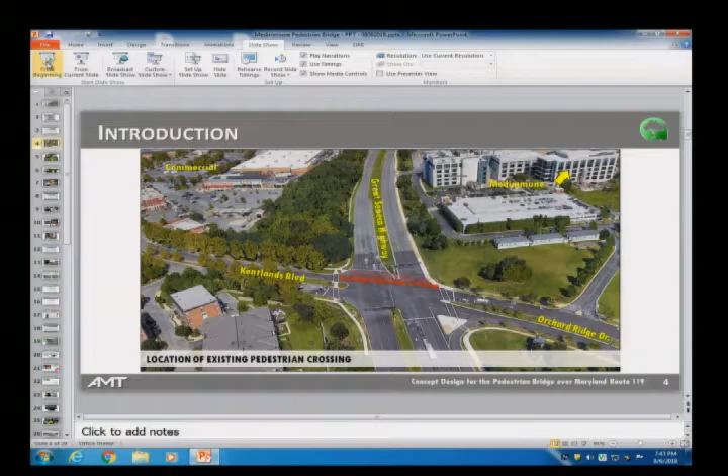What you see here is an aerial view of the project site. Let me make it full screen—sorry about that. You can see the Great Seneca Highway, and on the right side the MedImmune complex. On the left is the Kentlands Town Center commercial development, and we've labeled in red the existing at-grade pedestrian crossing.

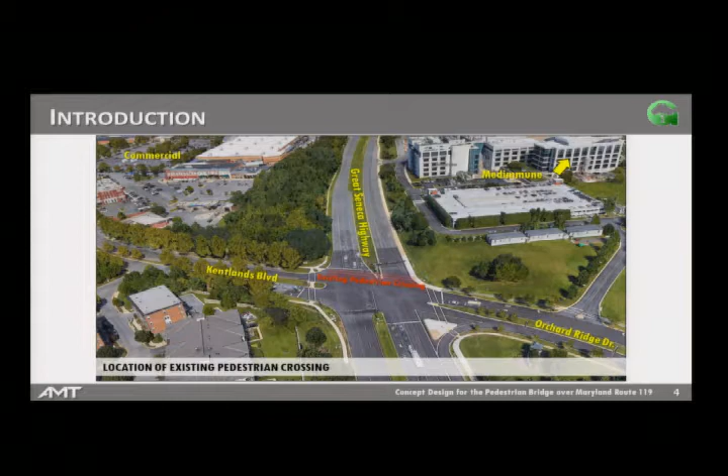Couple of views of this crossing, one from Kentlands Boulevard side on top, and on the opposite side of the crossing, which is the Orchard Ridge Drive side. You can also see how this existing crossing looks.

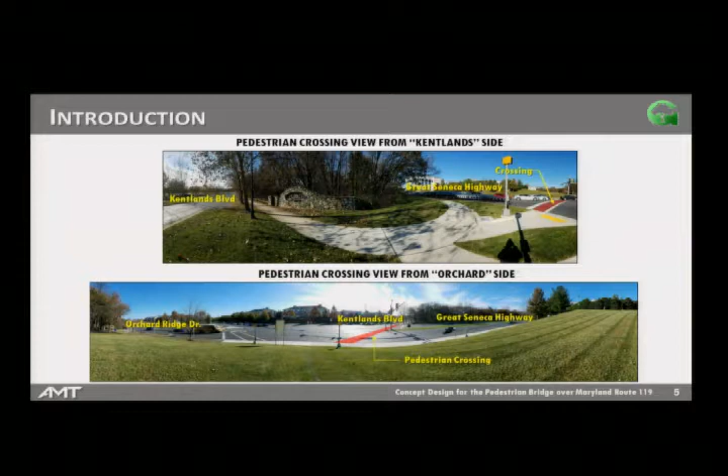We did a limited study that clearly justified the construction of a pedestrian bridge instead of using this at-grade intersection. We noted in this study that there was a 3 times increase in pedestrian and bicycle traffic at this intersection in the last 5 years. Also, large developments are expected in the area, which will definitely affect bicycle and pedestrian traffic. We ourselves witnessed that people don't care about the traffic signal—they just cross anyway—and this has resulted in several reported accidents at the crossing.

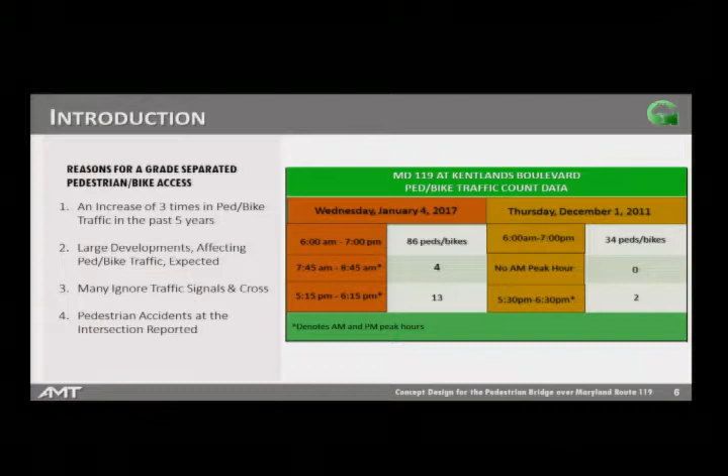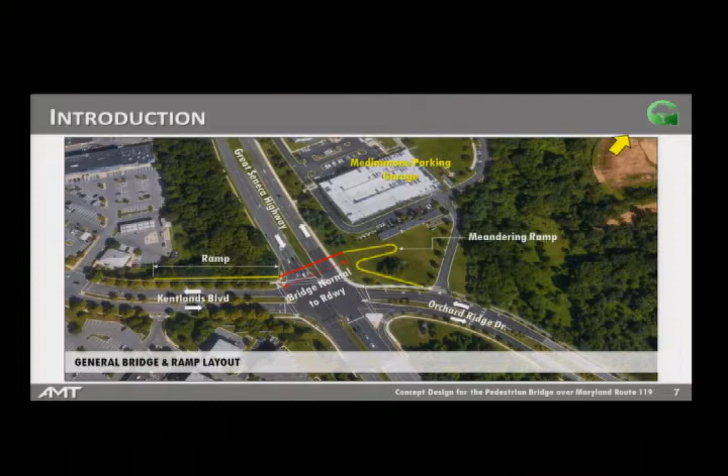What you see here is the general concept of the intersection that was presented to us at the beginning of the project by the city itself. As you can see, we have a bridge labeled in red. We tried to make it as normal as possible to the highway so we could reduce the length of the bridge. You can see a ramp on the left side along Kentlands Boulevard—we need a ramp to climb up to the bridge. On the right side, you see the meandering ramp, taking advantage of the natural hill in front of the MedImmune campus, which lets us decrease the cut and fill and environmental impacts.

Now, for any pedestrian bridge, there are certain specifications in Maryland and other states. You need a certain vertical clearance, which is 17 feet 9 inches in Maryland—that's where you should build the bridge. There's also horizontal clearance required for the bridge supports, so you must stay a certain distance from the freeway, about 30 feet, or build a barrier. Considering these factors, you can pretty much figure out the location of this pedestrian bridge as far as Great Seneca Highway is concerned.

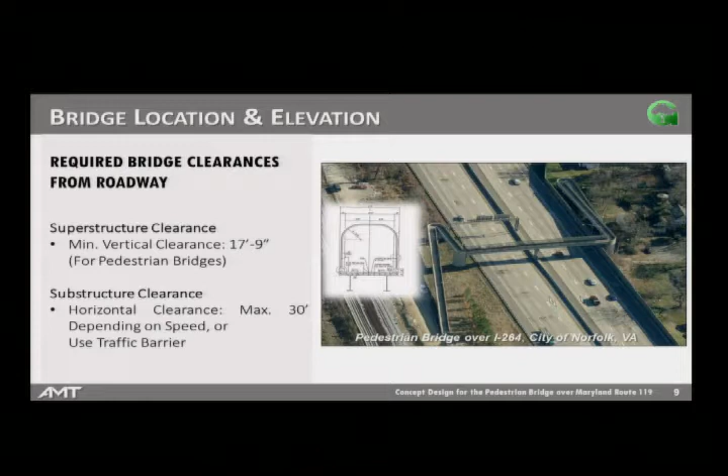Now, we looked at 4 alternates in conjunction with the city and evaluated them. The first alternate was a single span bridge, about 250 feet long, crossing Great Seneca Highway. For this alternate, we used a rather milder slope for the ramp, 5%, which requires switchback ramps on both sides.

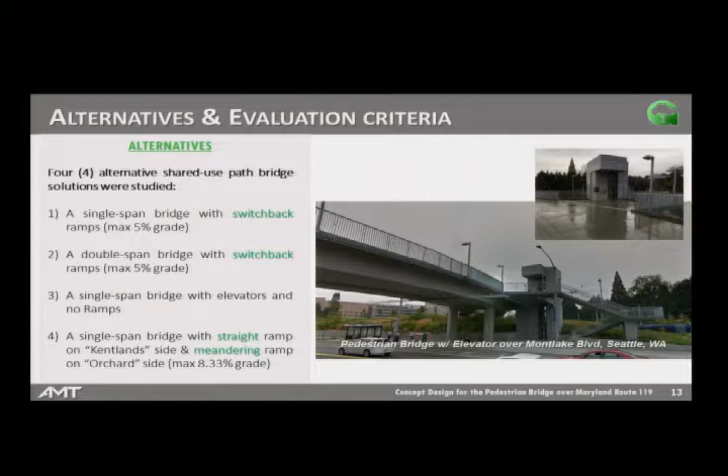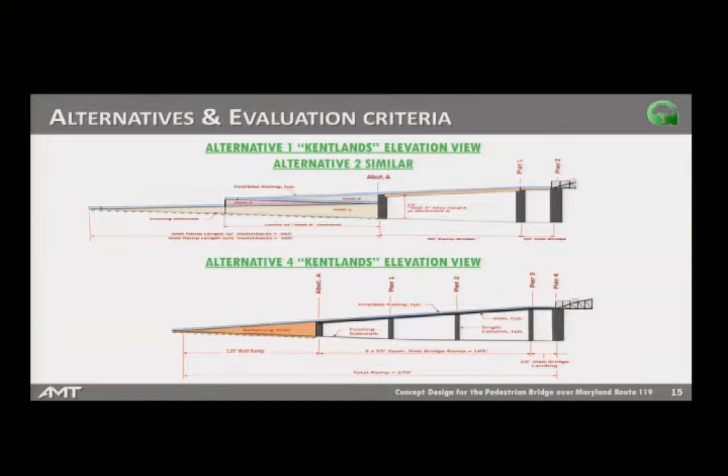If you want to compare the elevation view of these alternates as far as the ramps are concerned, looking at alternate 1 and 2 versus alternate 4 from the Kentlands Boulevard side, you can easily see the massive structure needed for the switchback ramps of alternate 1 and 2, versus a simpler, less environmentally detrimental structure for alternate 4.

The evaluation factors we used in the decision matrix are user convenience and likelihood of use, construction cost, maintenance cost, impact to traffic during construction, land acquisition, utility impact, environmental impact, and ultimately change in the surrounding scenery. We even looked at that.

We ranked each alternate against each of those factors on a scale of 1 to 5, 1 being most favorable and 5 being least favorable. Then we determined the combined ranking using weighting factors for each evaluation factor, all done in conjunction with the city.

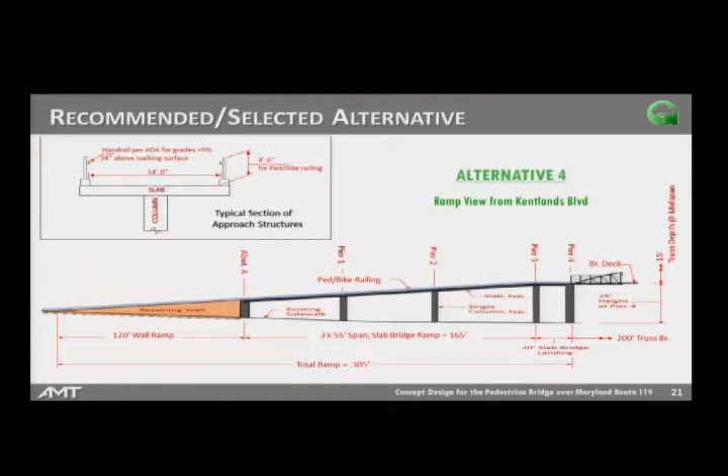As far as utility impacts are concerned, there's no utility impact for this alternate. We cleared all the utilities and decided to put the supports away from them. For land acquisition, we're going to need about 10,000 square feet to build the ramp and also have enough room for future maintenance and easements for access.

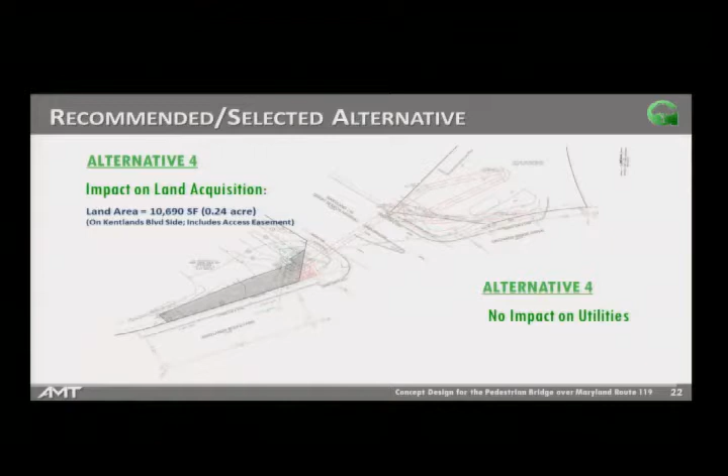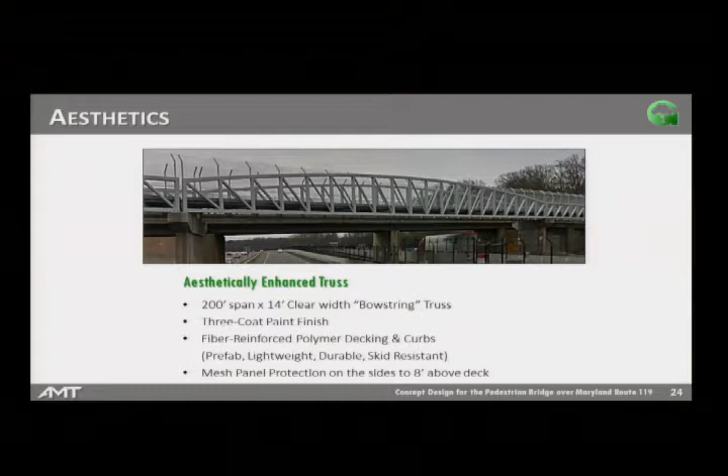Then we looked at some featured bridges. The picture you see here is actually a pedestrian bridge over the Dulles Toll Road and Access Road. It's the Wolf Trap pedestrian bridge, as a matter of fact. There were lots of good features there, and it's also a bowstring truss.

Here's a showcase of that bridge, built only several years ago. It's a beautiful bridge, and they used a certain type of lightweight material there. It's not concrete, so it makes the truss itself not too hefty. It's fiber reinforced polymer deck and curbs, lightweight material, with mesh fences on both sides, and you can see the method of erection and everything here.

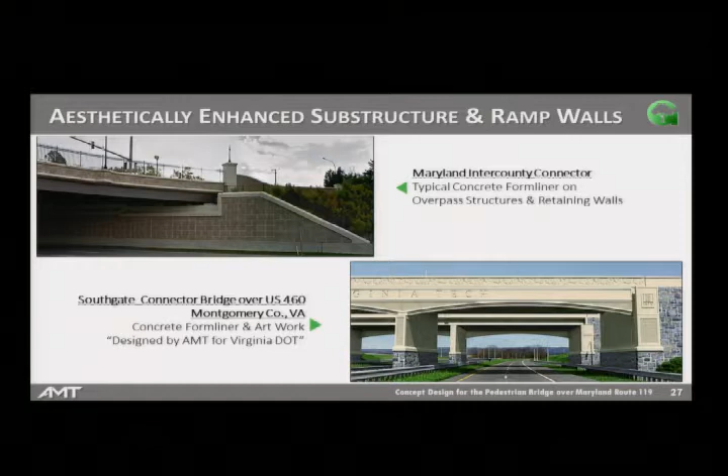The substructure, the supports of the bridge, lend themselves well to lots of architectural treatment, form liner. These days you see this on all of the Maryland bridges, as a matter of fact, on the highways.

And then we did a construction and design estimate altogether, as Ollie just mentioned. We're talking about $4 million for design, construction inspection, and so on. Thank you very much, and that will conclude my presentation.

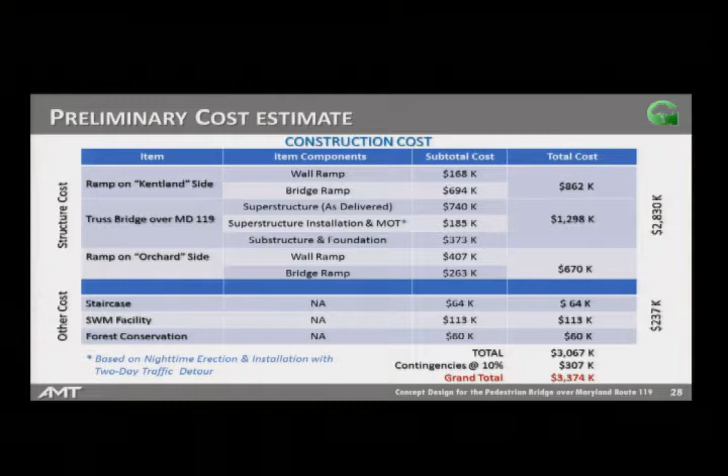Thank you. So at this point, we would ask if you had any questions on what you saw and general impressions. I first want to say thanks for all the work that you guys have put into this, and the approach seems pretty thorough, and it's exciting.

Now that we sort of know how we want to engineer this thing, aesthetics are important, and I think you guys have put some good thought into it. What you described as the support areas being architecturally designed as a matter of course now with all the state bridges, I definitely want to see some sort of nice appearance here, and it's got to hold up too.

Everyone saw the tragedy last year in Florida with that pedestrian bridge. We can't, no one wants that. But I appreciate the job you guys have done. I don't really have any questions. Who wants to go?

Lorianne. Yes, so I just want to second what our mayor mentioned. Very good presentation, very thorough. Really appreciate the street shots as well. I see the meandering bridge.

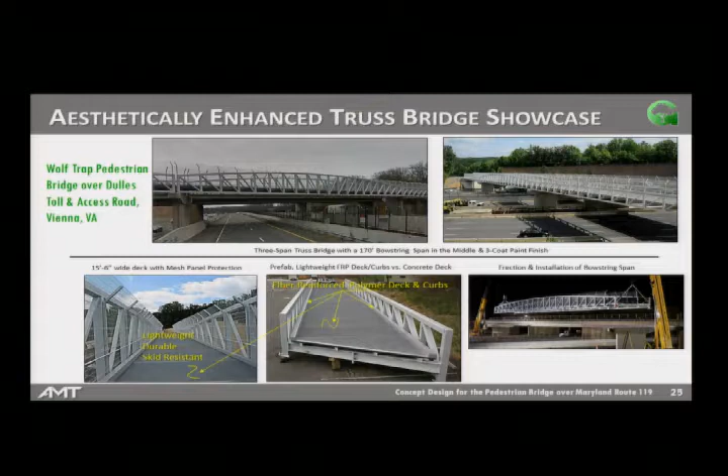How long would you anticipate the closure to be? Probably about 8 hours, an 8-hour window, done overnight. We'd have a better idea once we've worked out the actual details of the structure, but somewhere between 8 to 10 hours closure should allow them to launch it. The good thing is...

One of the options was a two-span bridge, meaning a pier in the middle. That pier construction requires a lot of time, and we'd have to close the road. But this is just a single span. We can do the approach part without closing, or with minimal restriction of the road. So we'll be closing the road basically just to put the superstructure in - it will be just a 1 day operation.

Neil: So just a couple of quick questions. First of all, thank you for your good work, we've been waiting to see this for a long time. This intersection is a bit of a challenge. A couple of quick questions.

On this decision matrix, I noticed that between alternative 3 and 4, alternative 3 with an elevator and no ramps has the highest life cycle maintenance cost, which I would expect because you have to maintain an elevator. I was surprised that alternative 4 was also on the high side in terms of life cycle maintenance cost. What is it about that design that makes it expensive to maintain? Was it the elevator part? No, the one without... Alternative 4 was shown just as high, poorly rated on life cycle maintenance cost, which is a bit of a surprise.

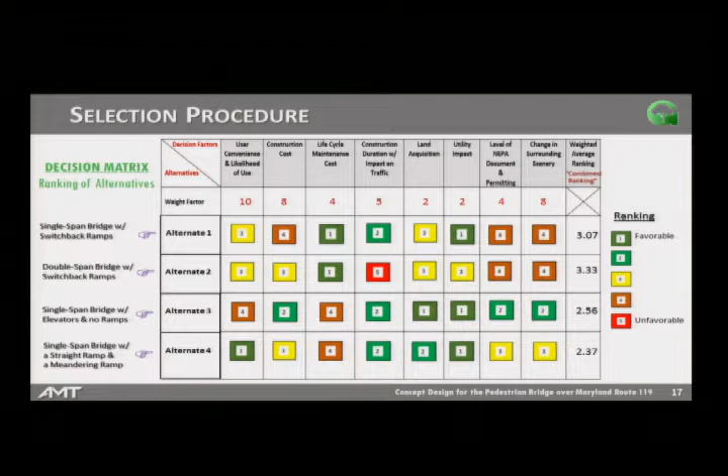That was just to make sure I was paying attention. Yeah, I really appreciate it, because we kept this until the final moments and we thought we took it out.

That's fine, because after all the numbers really don't matter that much for us, since there are so many considerations and so many inputs from the city senior staff and management, because it's really a major structure. But okay, that's fine, there is some error there. No, that's clear now, sorry for that.

A couple of other quick ones. On the Kentlands Boulevard side, the ground has a slope as well, aside from the slope you're putting in—there's a downhill slope. Do you know what the grade of that slope is, and how comparable it is? The grade of that slope would be something like 3%. Okay, so it's a fairly mild grade at this point, going down. I was just curious how to understand the comparison.

We developed, as a matter of fact, the first thing we did was a comprehensive survey, and developed the base map and elevations and everything. We have that—it's not part of this thing, but it's part of the study we did for the city. So in that, you can actually see the slope, as well as all the elevations we're giving to the bridge, and the ground elevations everywhere in that area. Okay, well, no, I understand, I was just curious as a comparison point.

One last question: the crosswalk that currently goes across Kentlands, across Great Seneca Highway, will that remain when the bridge is in place? We would suggest it remain. The reason is, if you take it out, some people may attempt to cross anyway, and it becomes a very dangerous situation. We don't see any harm in just having redundancy over there—just let it be, it's not going to hurt anything.

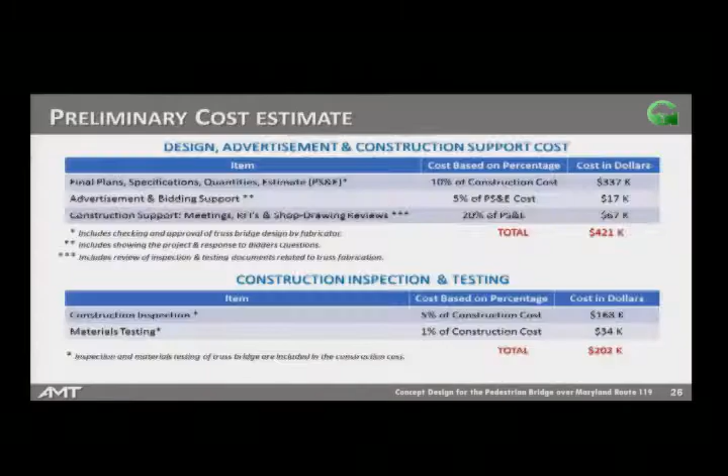This is a minor detail that would be dealt with at a later phase, but because of the grade of the ground, is it theoretically possible to add entry points to the ramp at a higher point, for example, for employees at MedImmune trying to access that crossing? From that parking lot, that would be possible, yes, absolutely.

More important, on the other side, is sort of the same question. The ramp on the other side is geared toward folks coming in and out of Kentlands Boulevard. If someone were walking down the sidewalk of Great Seneca Highway from the north, they would walk underneath the bridge, and not far from there, there would be staircases to climb up in that case.

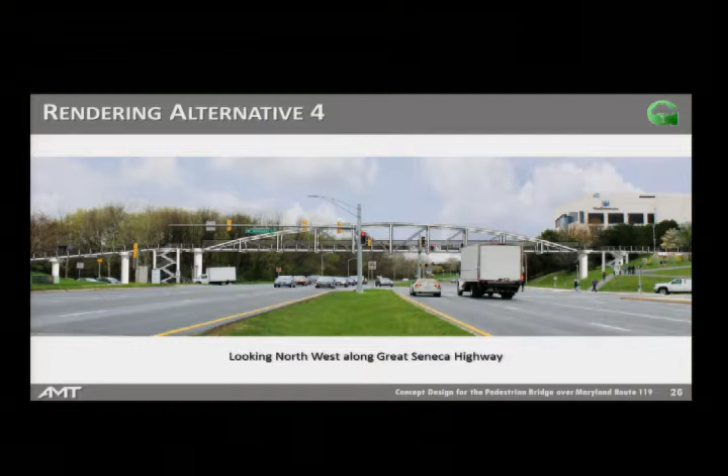This is a question combining one for you all and for our staff. To remind the public, we had a financial contribution from MedImmune toward construction of this bridge. What was the amount of that contribution? Four million dollars. And the estimate for design, construction, and all the added processes is also about four million dollars, right? You didn't know that — we just came up with it. Just a good coincidence.

Okay, great. That's nice how that came out. Good how that worked out.

Again, we don't know exactly when this project might start full design and construction, but when it does, is there an estimate of how much time it might take to build? We are estimating, as far as design is concerned, including getting permits and everything, approximately a year, and the same amount for construction, so maximum 2.5 years. You could take it up to 3 to be safe. Okay, great, those are the questions I had. Thank you very much, Mike.

Well, most of the questions that I had have been asked. I think, and really it's about the aesthetics, I think we all have an expectation for construction in the city and things that the city owns, for the architecture to be distinctive. And it seems like there are opportunities for that here.

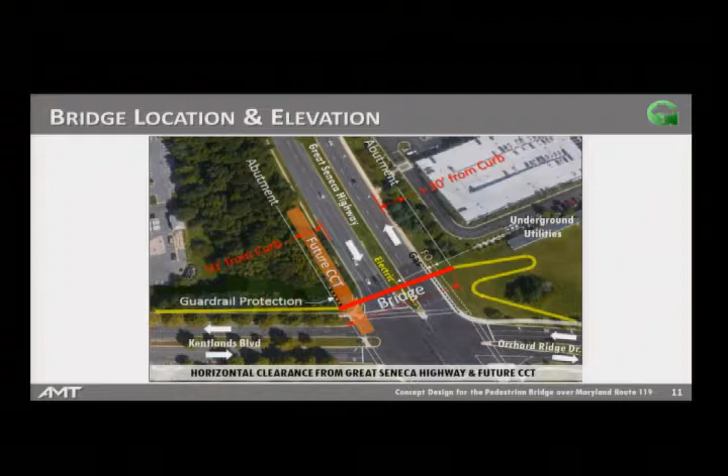If we stay at the first support or first pier on the Kentlands side, the face of the pier, if we stay 50 feet from the curb line of the Great Seneca Highway, we have enough room to clear the future CCT in conjunction with a guardrail. Here, as GK was saying, you can see the cross section of it.

On the cross section here, you can see the Great Seneca Highway. You're looking south in here. The red arrow is actually the Great Seneca Highway. Looking south, you can see the curb of the Great Seneca Highway. If you stay 50 feet away from that, you have cleared the future CCT.

These are the plans we got, cross-section of the future CCT, as a matter of fact. In conjunction, what you're seeing here in black is a proposed guardrail, and next to that is the proposed pier of the bridge. Okay, 50 feet will take care of us.

So there's no concern about potential disruption or... No, that would clear that, and that gives us 200 foot long. But in terms of during construction, there's not going to be any change in the stability or potential impact to the stability of that pier while the roadway is being constructed?

No. We got some geotechnical information from MedImmune for the construction of MedImmune itself. The foundations of these piers are drill shafts, about 40 foot long, drilled and founded on bedrock underneath. So anything up there for the roadway will be superficial, basically, as far as the foundation of the piers is concerned.

Thanks, Mr. Mayor. I'll pick up where Mike left off with the discussion of the proposed future CCT. I've got the slide open - I don't know if you need it, but it looks to me like the pier side pedestrian access is no longer there. It looks like the pedestrian access is now an island between the buses and the road. Which slide are you looking at? What's the number?

That slide, number, okay. If you look at the cross section here, you can see that sidewalk next to the curb. I believe what they have in mind is the enhancement of the existing sidewalk. If you look at the cross section right here - curb, and then it's a 5-foot sidewalk, and then there's 4 feet of, I believe, a shoulder to the sidewalk.

But it looks to me like it's Great Seneca, curb, pedestrians walking, buses, then a guardrail preventing any pedestrian access, so you wouldn't be able to make an immediate left coming down Kentlands Boulevard and walk on a sidewalk. You'd have to cross over the CCT bus lanes to get into that island sidewalk. Is that correct, or am I misreading this cross-section?

In order to get to that, obviously we have to manipulate that guardrail over there for access. We haven't gone that far, but there are ways of doing that to give access to that sidewalk. And the other problem is the sidewalk is continuous, and the CCT line is continuous - at one point they have to cross the CCT line in order to access it.

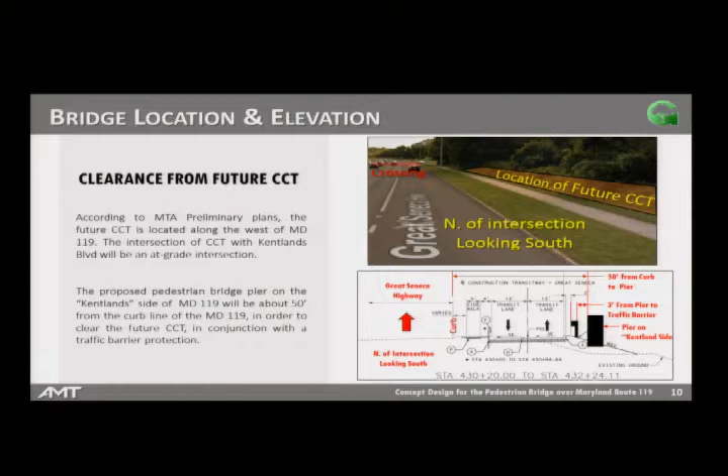Anyway, maybe I haven't looked at the future CCT plans well enough. So the sidewalk is not going to be at the same grade as the CCT lanes at that point? Is that the elevated platform? It's going to be elevated. Okay, so it's above - it's across, so that's why you can't go under. Yeah, so the elevation is up here.

So this would remain as green space as it rises. Okay, Great Seneca - if that's true, if you can still have access, that's fine with me. But okay.

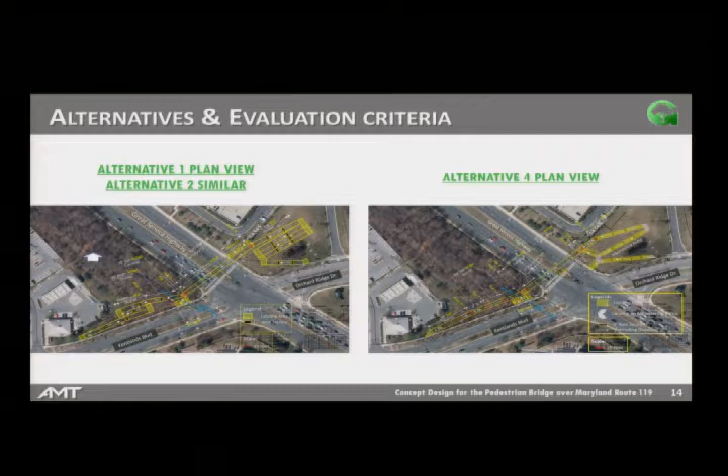So I shared Ryan's concern about the access, particularly for the MedImmune employees. For me, it would be important to have an at-grade entrance from the elevated MedImmune building straight onto some portion of the meandering ramp. I think that would be the best and most efficient way for those employees to come and enjoy the benefits of the Kentlands, whether for lunch or dinner. Not only would it be possible, I'd say it'd be very important to have that kind of access.

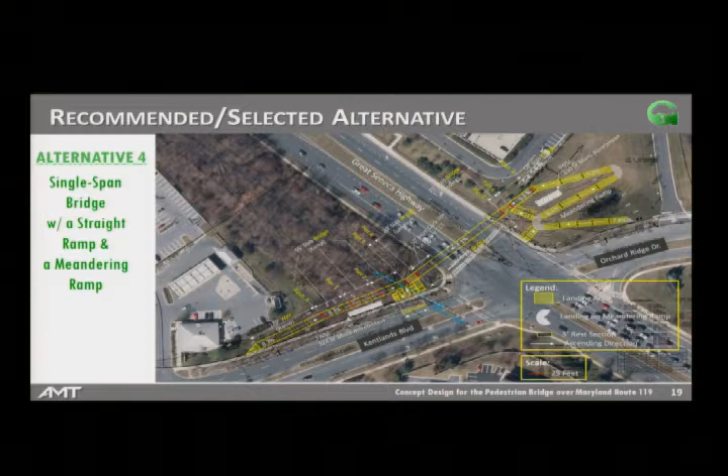Yeah, so that's what I was talking about - from the parking lot. Is the ramp fenced, or is it just a path? It doesn't have railings, I think. The ramp has to have railings at least partly, because of ADA - one side of it is the hill, the other side has a fence, 4 foot 6 inches.

So on the uphill side, there's no fence, correct? No, but you want the ramp to have pedestrian guardrail - a pedestrian barrier on one side, which is a pedestrian railing, 4 foot 6 inches. On one side only, the other side is the hill itself. That's what I'm asking - so if you put a little path from the upper part of the hill, that's all we're asking. Yeah, that's doable.

That topic was discussed in the meetings we've had with MedImmune. They are acutely sensitive about cut-through traffic through the campus, so they're still thinking about whether they want that. I personally think they have thousands of employees there that could use this bridge, and they're not going to be inclined to walk all the way down that hill. They're going to want some sort of direct access, but they are still thinking about it on their property at the moment.

Where would they be cutting through to? Quince Orchard Park, or Quince Orchard Road, if you were walking from the Goddard School on your map there, something like that. I'm just saying how it was handled when we talked to MedImmune staff. They're still thinking about it, and if there's no path, people will make a path. So that's what's likely to happen. I think we suggested they may want to make a path, or wait till the path is made, then figure out how to make it permanent.

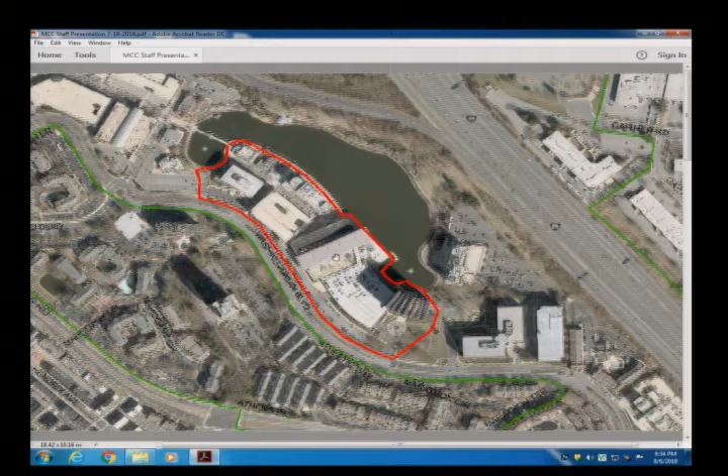Staff has worked with the applicant to ensure there are no issues with parking regarding the change of use. The Washingtonian and Rio Centers shared parking chart continues to have over 100 spaces more than what is required by code. Only the change of use is before you tonight; no site improvements are proposed with this application. Based on these factors, staff recommends that the council find the application to have a minor impact and direct the Planning Commission to make a final decision on the amendment, and be happy to take questions.

Thank you, Ray. I couldn't agree more, this is a minor impact. It's just adding another use, to allow for private education in this one spot that already exists. What's the pleasure of the council? I agree with the mayor. Someone want to make a motion?

Well, I agree, but I just had a question. So the impact is there isn't going to be much impact on current parking levels and spaces for either the health club or the hotel. Correct. Yes. Okay, so they'll use the existing parking structure. Yes, and on-street parking. Okay.

You want to make the motion? I'll move. Second. I'll move it. Okay, all those in favor of deeming this a minor impact, a minor effect, and passing it to the Planning Commission, please say aye. Aye. Any opposed? Okay, carries 5-0. Thank you very much, nice job, Ray. Really fast, really fast.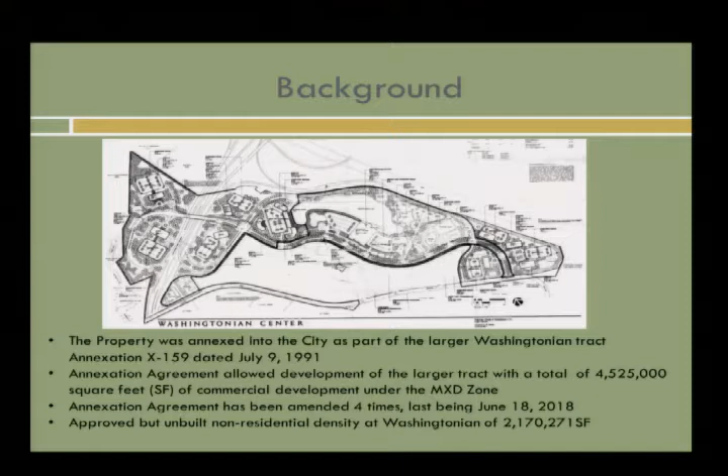Thank you. Welcome, everyone. Good evening. So as Lynn mentioned, I'm going to briefly go through some of the background. On the screen right now is the entire section that was annexed in 1991. The important thing was the annexation agreement associated with this gave a cap of approximately 4.5 million square feet of commercial development under the MXD zone. The annexation agreement has been amended 4 times, the last time being June 18th of 2018, which was the conversion of the office building in Washingtonian North to senior housing. The approved but unbuilt non-residential density of Washingtonian is approximately 2.2 million left of that original 4.5.

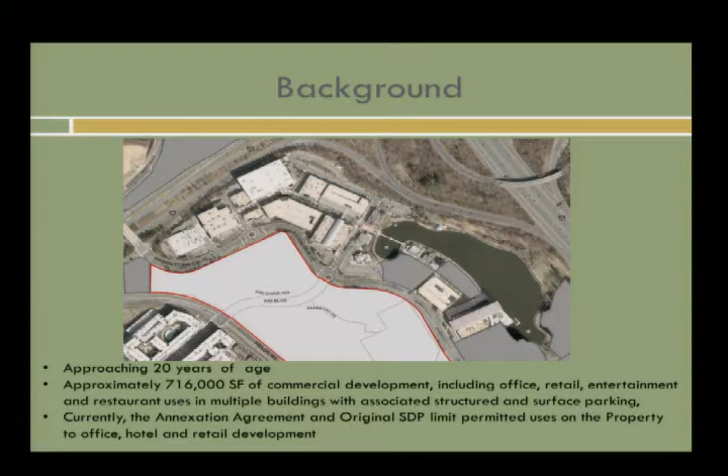As to the complex itself, as Lynn mentioned, it's approaching 20 years of age. It currently sits with approximately 720,000 square feet of commercial development. Everybody's been there, we know it's office, retail, entertainment, restaurant uses in multiple buildings. But the issue is currently the annexation agreement and the SDP, and the original SDP limit the permitted uses on the property to office, hotel, and retail development.

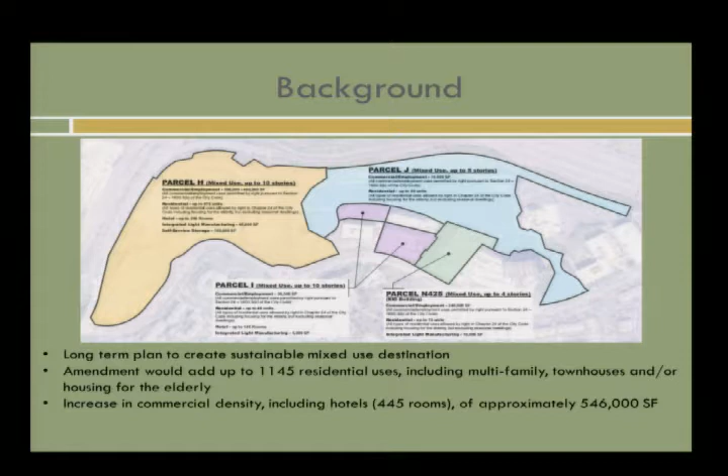So as was mentioned, Peterson is looking long-term to keep this as a sustainable mixed-use destination. The main tenets of the proposal and the plan basically divide it up into 4 parcels. It wants to add residential and other uses to build upon the foundation that's there now as an entertainment and retail destination, but keep it sustainable over the next 20 years. So the proposal is asking for up to 1145 residential units that can be a mix of housing types depending upon its location, and to increase the commercial density, including hotels, with approximately 546,000 square feet of additional development. This includes a mix of uses that go beyond just retail, like manufacturing, amusement centers, and other various things.

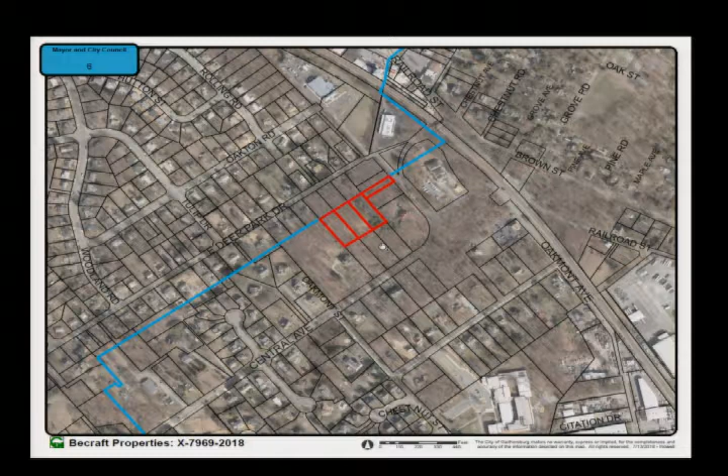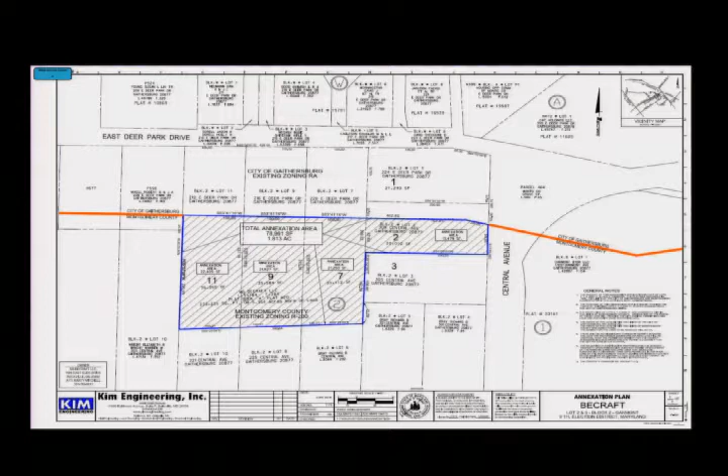This is the annexation plan. The annexation area, again, totals about 1.8 acres, and it is within the city's maximum expansion limits. The area is currently zoned County R200, which allows residential development with a density of up to 2.18 units per acre. The applicant is requesting the city's RA zoning, which matches the zoning on the city portions of the parcels, and it allows the same density as the county's R200, 2.18 units per acre. Should the Mayor and Council vote to introduce the resolution this evening, the annexation process will begin, and the Mayor and Council public hearing is scheduled for October 15th, 2018.

Great. So again, this is just an introduction, and if we vote to introduce, that's when staff notifies the county, yes, and the county gives us some sort of feedback about their blessing or not on this. Yes, they just have to determine if the zoning will be substantially different from what is proposed. Right, from currently what it is zoned as.

Okay, questions, comments for this introduction? If not, does someone want to move? I'll move the resolution of introduction. Second. Move the introduction of the resolution. It's you move to introduce the resolution. Right, so okay, and we have a second. So all those in favor, please say aye. Aye. Any opposed? Okay, carries 5-0. Very well done.

From the city attorney, nothing further. Anything from any other staff?